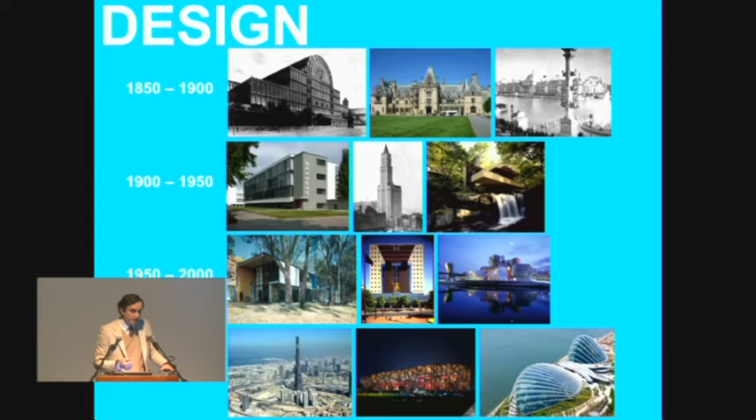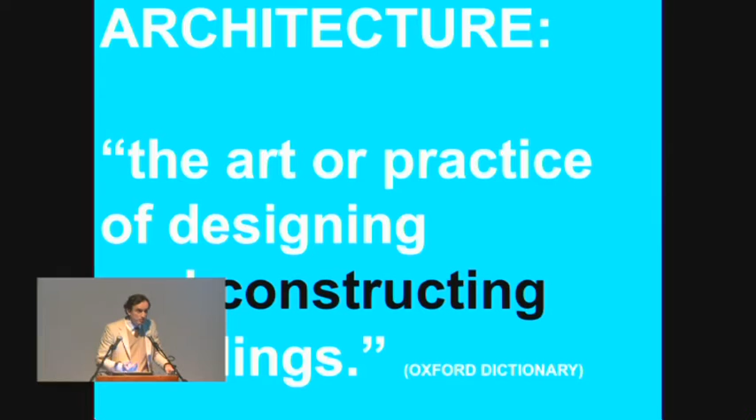But again, looking back at the definition, that's only half the equation, okay? So now let's look at the other half. What have we done as architects in developing new and interesting and conscientious ways of constructing, right?

Well, 150 years ago, little more, here they built the Crystal Palace. 90,000 square meters, 5 stories tall, glass facade, curtain wall, totally modular steel frame. We haven't really come far.

I would say that we haven't really come anywhere in terms of construction in the last 150 years. We build different shapes, but we build them in the same way, okay?

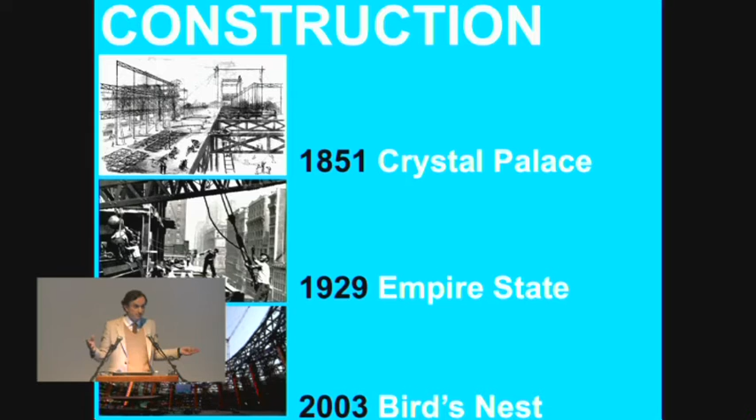So, you know, getting back to this definition of architect, we've only been doing half the job. Now, what is construction? How important is it? Why should we look at it?

Well, by definition, or statistically, I should say, it represents 10% of the world's GDP, so it's a huge industry. 1 out of every 7 jobs, it provides 1 out of every 7 jobs in the world, and it represents 1 out of 3 basic human needs. We spend most of our time in buildings, we keep all our possessions in buildings, we house our families in buildings, okay? So this construction thing is kind of a big deal.

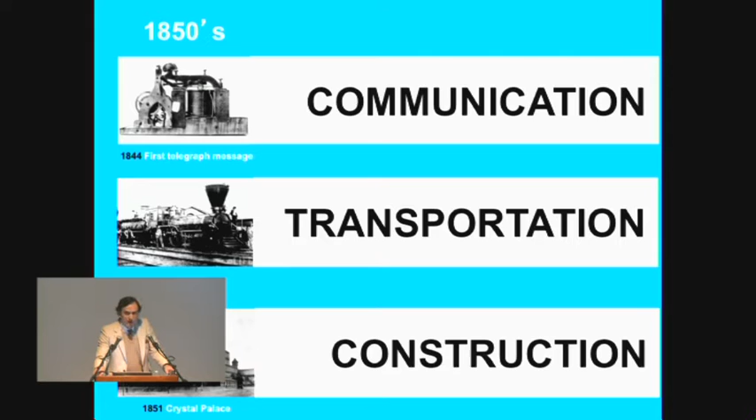Now, to put it in context, let's compare construction and the evolution of construction over the last 150 years to 2 other big industries. Now, these aren't industries as big as construction or as impactful, but still, they're pretty big: communication and transportation. 150 years ago, more or less, they developed the first telegraph.

Now, we've got little supercomputers in our pocket. We can research practically all of the world's knowledge at our fingertips on our computers, and we can reach out to anybody that we'd ever like to know. So, you know, it's pretty easy to make the argument that we've come a long way in 150 years in communication.

Similarly, 150 years ago, they invented the steam engine, or also they just patented the bicycle. Today, we've got supersonic jets that are incredibly high performance. We've got high performance electric cars. We've got a Martian rover. So clearly, we've come a long way when it comes to transportation.

But, you know, my argument is very, very little, relatively nothing when you compare it to these other industries. I mean, honestly, the Crystal Palace, 90,000 square meters of it, was conceived and completed in 6 months. Can anyone think of a building even half the size that was executed from concept to cutting of ribbon in even double that time? Right? It's kind of wild that Joseph Paxton was so far ahead of his time, and that we've really dropped the ball since then.

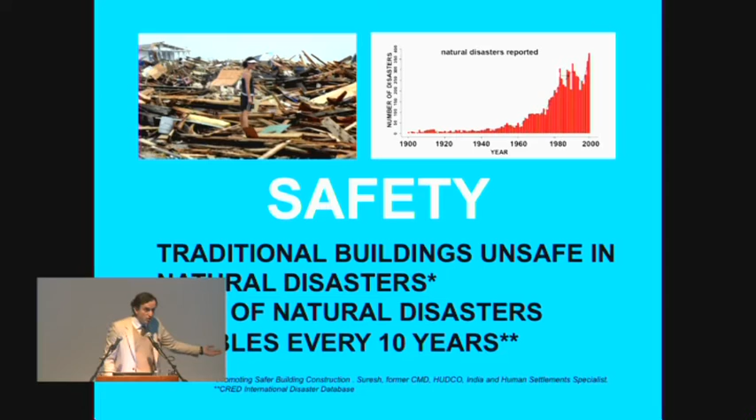Our lives depend on it, so do our children, so does everything we own. Now, in terms of affordability, construction is questionable too, because 1 out of 4 people today is either homeless or living in substandard housing. So we have to come up with a better way of building from a humanistic standpoint. 1 out of 4 people in this room statistically should not have a house to go home to.

And building is by far the worst polluter, accounting for 50% of our natural resources annually. It uses 40% of our energy. 40% of our carbon emissions are produced by construction, and 35% of our solid waste stream. This is a very, very large, wasteful industry, and nobody's talking about it or doing anything about it.

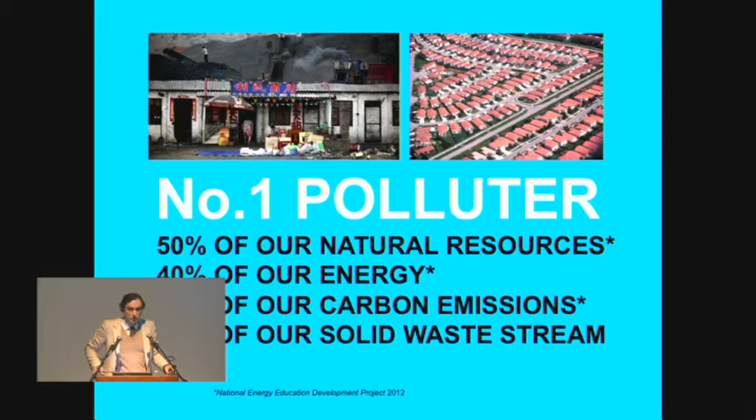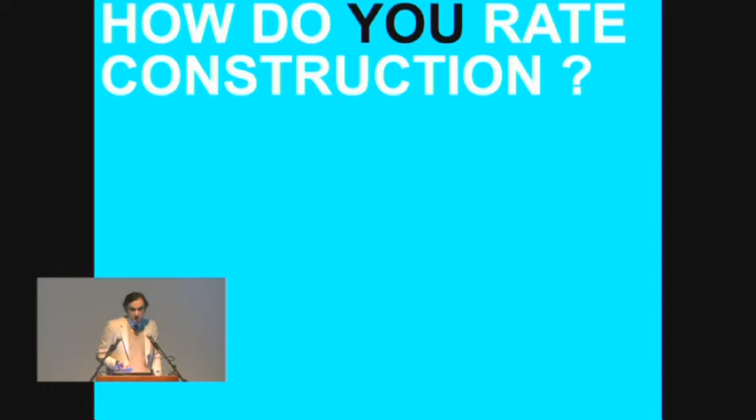So looking at this, remembering how well we've done in design, the question is, how do we as individuals rate construction? How's it going? How much have we done in the last 150 years? Do we need to think about it? My opinion is that construction is not safe enough, not green enough, too costly, and technologically antiquated. And I think the facts bear that out pretty solidly.

So what's interesting is that I was part of the problem rather than part of the solution. But what this book is trying to teach us—and you can see how thick my head is, because I only caught up to this about 5 years ago when I had children of my own—what my father is telling us is, let's look at different ways of construction, because it's cool. There's a lot of opportunity. It's a big industry. There's a tremendous need.

If you care about people, think about construction. If you want to make a lot of money, think about construction. Even if you want to differentiate yourself from the masses of talent that are all looking at design—I have a blog, and I've been posting great architectural firms every day for the last 5 years. There's so much talent all around the world looking at design. If we could take a small percentage of that talent and dedicate it to construction, which is by definition half of the equation, without forgetting about design—why? It informs design. And that's what this book is about.

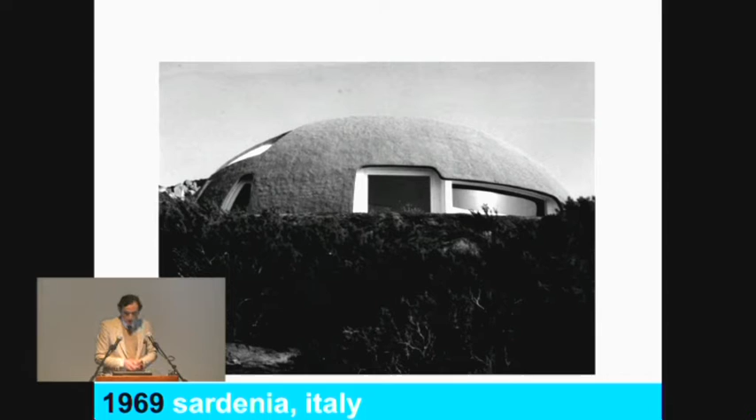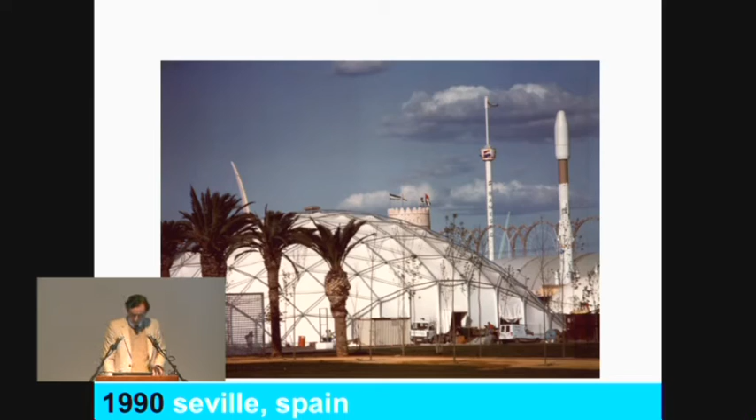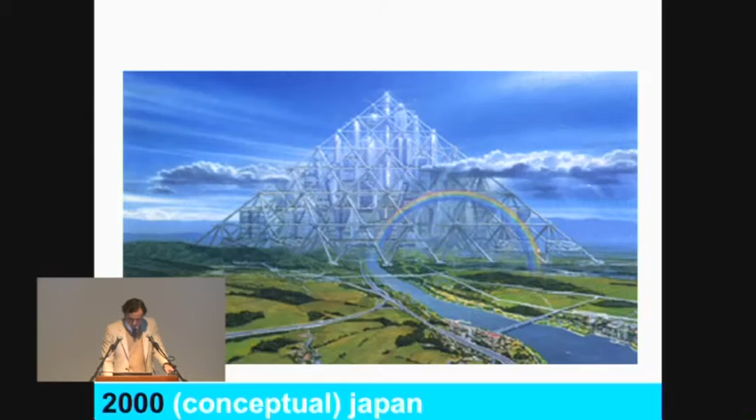So all sorts of interesting ideas, all explained in the book. And it's cool. One of the things that's cool about thinking this way, and the opportunity we all have when we start thinking this way, is that we have pretty good company of people who all thought differently and had fun and did good stuff.

That's the thing my father's encouraging all of us to do. So that this isn't totally abstract, I decided to illustrate an example of how I tried, 5 years ago, to start cluing in and take some of his thinking and evolve it in some way. So I had this sort of technological know-how, all these various construction systems invented by my father.

Now, a lot of these systems were no longer code compliant, so I had to look into codes and evaluate international codes, make sure that whatever I came up with conformed to those codes, because you have to be practical. I also looked, with my team, at material improvements, of which there have been many, and compared different materials, availabilities, etc. Then I also tried to look at this from a market standpoint, understanding the market, speaking to people who know a lot about things I have no idea about, and learning from them.

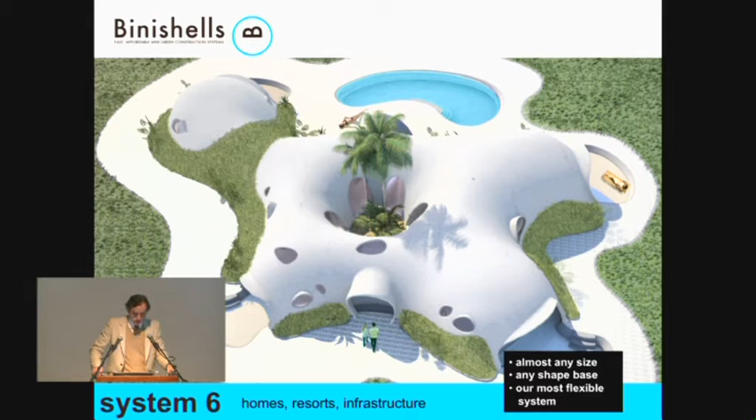Then, in a more expressive, architecturally based solution, we developed Binishell System 6, which is practically any size, any shape, very flexible, still very green, and highly affordable compared to traditional structures, and applicable for homes, resorts, and other infrastructure projects.

The net result is that the costs are reduced. By this I mean environmental costs, because we use less materials, less than half the materials, and also bottom line costs. The two biggest line items in building are materials and labor, so we use less of both. Because of that, it costs less, but at the same time it's far more green, which is increasingly important.

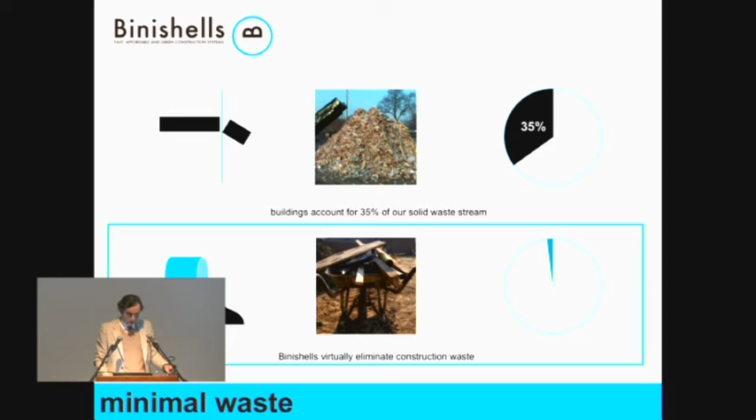Why? Primarily because of the efficiency of the building envelope. It's a thermal bridge-free envelope, and as I said before, that really impacts the energy use of the structure in a very positive way, decreasing it by around 75 to 80%. And then there's minimal waste - there's no cut material on site, it's all poured, you just pour what you need. So you get at most a wheelbarrow of waste per building, which is an advantage for cost and from an environmental standpoint.

And it's far faster, which is cool because if you've had a disaster in your country and need to house people quickly before they get diseases, it's important to act fast. But also, if you're a construction company looking at your bottom line, building things 3 times faster means you can do 3 times as many projects in a given year, which is really all they think about. So you feed into that, but with a better product. In the end, everybody wins.

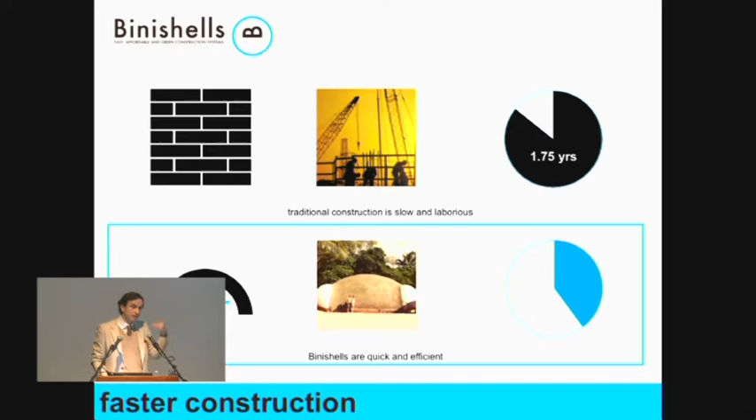And it's far safer. We all know that traditional construction has right angles, beams meet columns. That is actually the least structurally efficient way of building. Interestingly, that's how we build and house our children and all our precious things.

A dome, on the other hand, instead of concentrating energies in very inefficient ways, distributes energy in the most efficient way possible and is therefore far more materially efficient, which is why we use less materials and impact the environment less.

So what have we done with these things? A couple of examples: we've got an exciting project in Malibu for one of the most famous actors out there, and this is going to be his family's home. We're looking at interesting ways of developing the interior as well as the exterior, which is both innovative from a design and environmental impact standpoint.

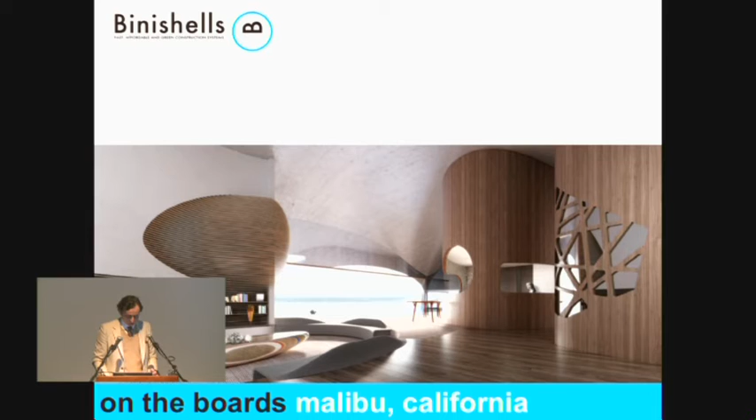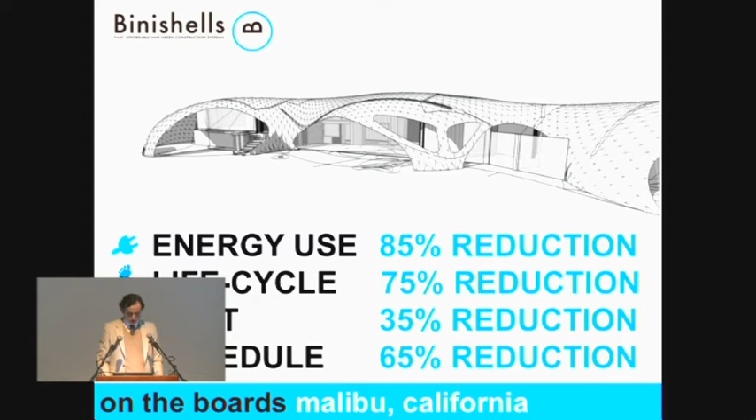The net result of this building will be that at minimum we'll reduce energy usage by around 85%. Harvard's going to be doing a study verifying all these numbers, but this is what we're coming up with so far: at minimum a life cycle reduction of 75%, overall construction budget reduced by about 35%, and at least a 65% reduction in the overall construction schedule.

We also are looking at low-cost disaster relief housing in the Philippines, using System 5, and there will be a reduction in energy use by around 70%, life cycle impact by about 55%, costs by about 45%, which is exciting, and schedule reduced by about 75%.

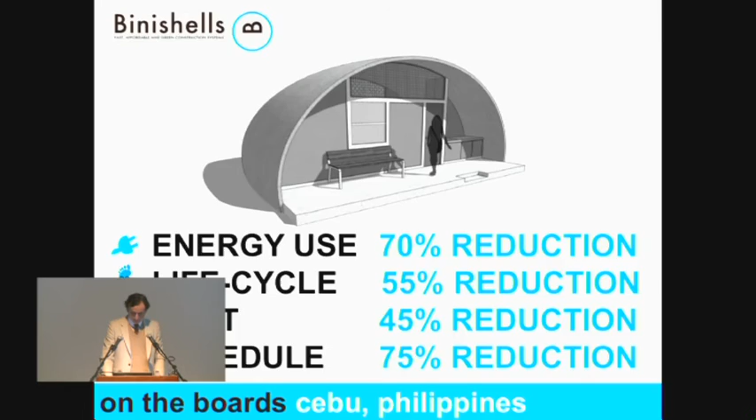So again, it's exciting and important, I think, to absorb the lessons of my father through this book about thinking differently about architecture, and to use local slang, think out of the box and carry on.

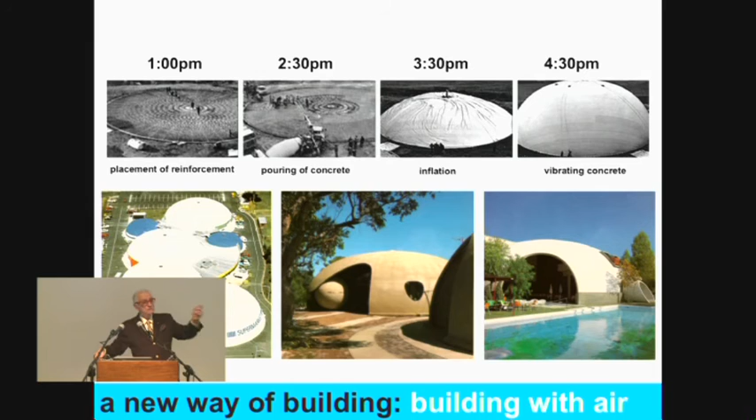Okay, thank you. You have 300 tons of wet concrete—25 ready-mix concrete trucks, to give you an idea. The first time I did it, I could not believe I was able to raise this with a blower of this size, with such negligible pressure.

This is covered with a second membrane only because we want to vibrate it. The problem is that when you lift the reinforced concrete, it disgregates a little bit, so you need to recompact it to make the structure solid.

Initially we smooth it by hand, but when you have such big dimensions—you see those are people—this is a 36-meter diameter dome, bigger than your St. Paul's dome. And when it comes up in 60 minutes, you have to finish the job in that time, because otherwise you produce a skating rink.

So this is a limit. Using this concept—controlling the uplifting and using the cover to vibrate the concrete—you produce a real self-reinforcing process.

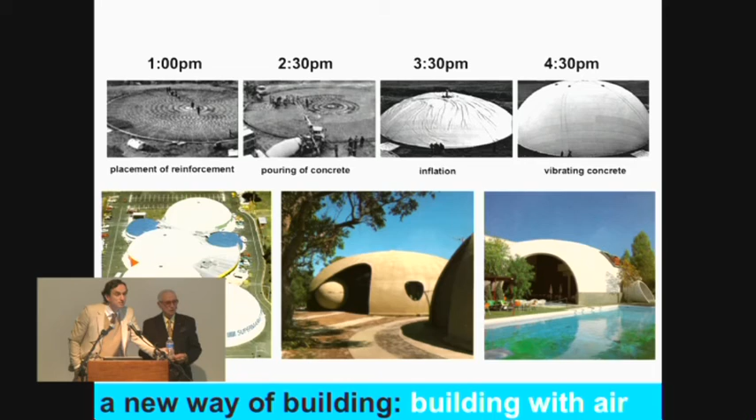No, I'm just saying—sorry—that the reproducibility of the same dome multiple times, I'm just questioning if this is actually getting the design closer to the fight of making architecture, because I find it really interesting to challenge the fact that architects are not thinking in this design way, which can be really interesting.

And so the thing that interests me, and what I did my thesis on when I was at grad school, is this massive international need for low-cost housing. So when I thought about it with a friend of mine who's an engineer at the English firm Arup—we went to grad school together—we thought about what is the most efficient way of building.

How can we think about a way of providing homes that fit a lot of bills and check a lot of boxes? What we found is that this idea of building domes is extremely efficient. Why? Because domes are stronger, therefore you use less material. Concrete is extremely environmentally inefficient, while at the same time being the product we make most of as a species.

They don't burn, they're fireproof. And the resulting structure is very strong in all sorts of different ways, like Dad's pointing out - fires, earthquakes, high winds.

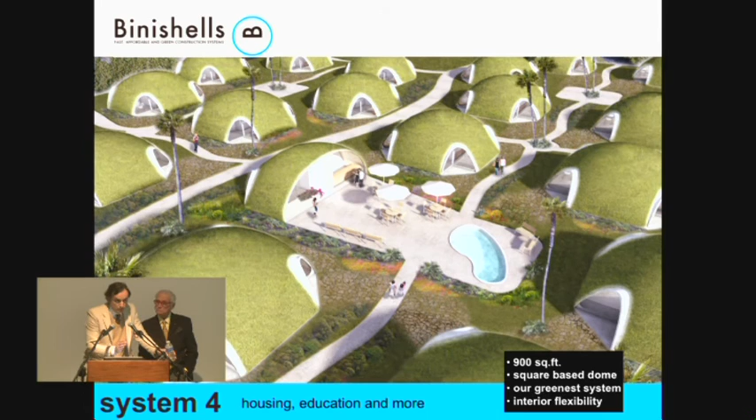So the next challenge is, how do you aggregate them? I'm not suggesting either of these two ways are award-winning solutions, but what we're trying to do is think about when you do a lot of these things, what do they look like? The argument can be made that the Hellenistic concept of a pitched roof and a square box under it is not necessarily objectively attractive, nor representative of home or any of the cultures it ends up being implemented in, other than possibly Greece. So if you provide another solution that costs, let's say, half as much, but is greener and stronger, you're heading in the right direction.

One of the other things I wanted to look at is the fact that domes are something that's especially difficult to marry with the concept of home. So what we've done is taken the circular plan and turned it into different, and sometimes rectilinear, shapes to facilitate ordinary lifestyles. It's a step towards improving the environment, providing safer homes more affordably and efficiently.

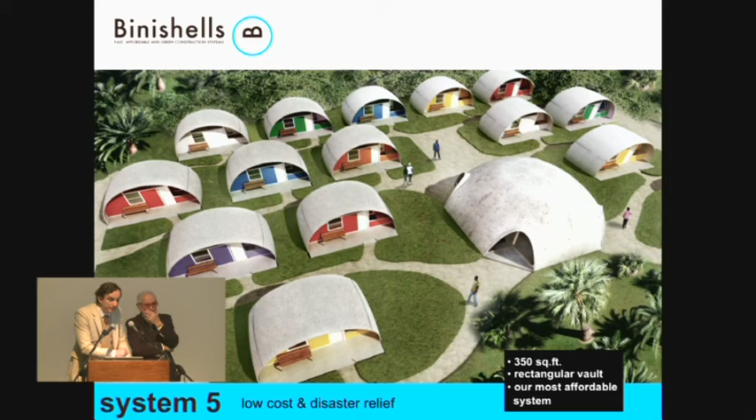But it's exciting, and I like curvilinear. I think it's very sexy that this system is not designed by me, but is designed by nature, specifically Pascal's laws. And that, to me, makes it more objective than, again, the Hellenistic pitched roof solution. You can say it's a little bit more pan-cultural because it's not biomorphic, it's biologic, so it's quite interesting from that standpoint. It turns out that a lot of other designers are looking at curvilinear too, but a lot of great design has also been developed as rectilinear. I think there's room for both.

But the main thing is, let's just think of the other side of the equation, because construction is a big deal. Yes. No?

Oh yes, I'd like now to keep it on track, and thank you for your interesting presentation. Last year, in the month of July, I found out that IKEA had a similar idea to yours, and when you mentioned that you talked to the UN about it, I'm very interested in their opinion, because I actually know IKEA's costs for what they are trying to do in changing the tents that house political refugees and zones of conflict.

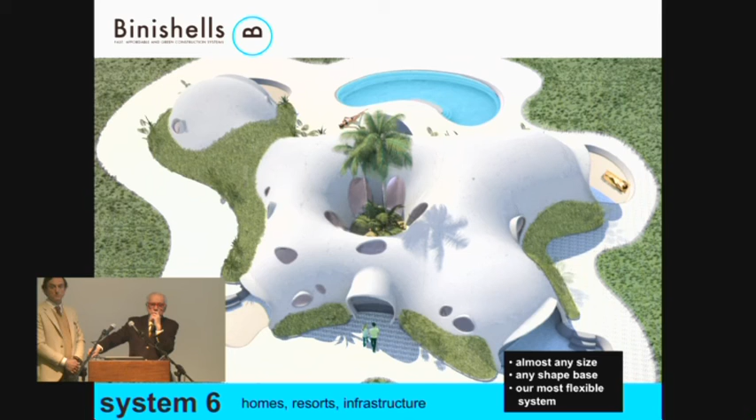So they're talking about designing a low-cost house that in prototype phase costs around 10,000 euros, and when they begin mass production, it will cost around 1,000 euros per unit, which in my opinion is around 10 times more than you pay for a tent. So I would like to see what's your take on this?

We don't know about the mass production element yet, but in working with a company out in the Philippines, our prototyping cost for each unit is somewhere around $2,000 for a finished structure. The additional advantage versus prefabrication, which is as old as Stonehenge potentially, is that it's all built in place, and the material is developed by a local cement company, which keeps the money locally.

Plus, when you look at the environmental impact of prefabrication, prefabrication begins in the Swedish plant or in a local plant built to build these things down the line. And the overall efficiency of a prefabricated structure is very comparable to a traditional structure, versus a thermal bridge-free envelope which provides additional advantages.

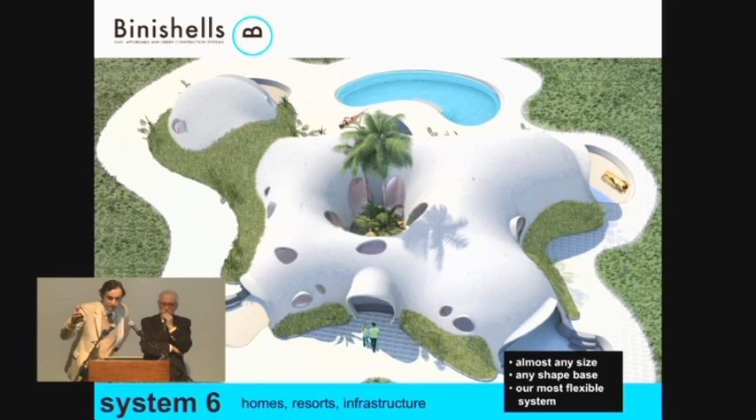So there's room for all sorts of different solutions, and it's wonderful that a forward-thinking company like IKEA is looking at low-cost housing. What's surprising to me is that more students, more architects aren't looking at the big picture of low-cost housing and the opportunities it presents.

Yes? Microphone. Hello? Yes.

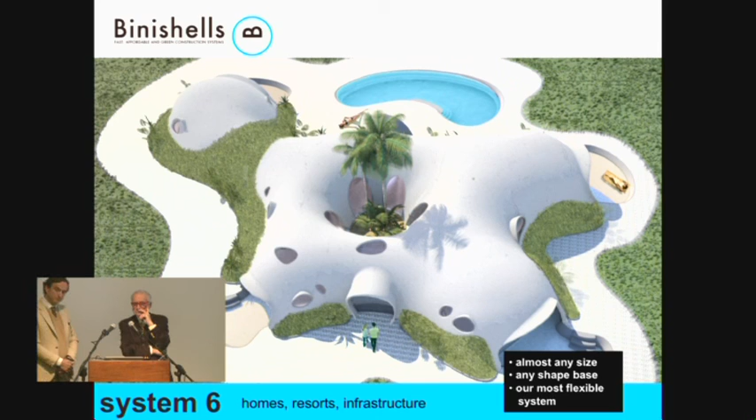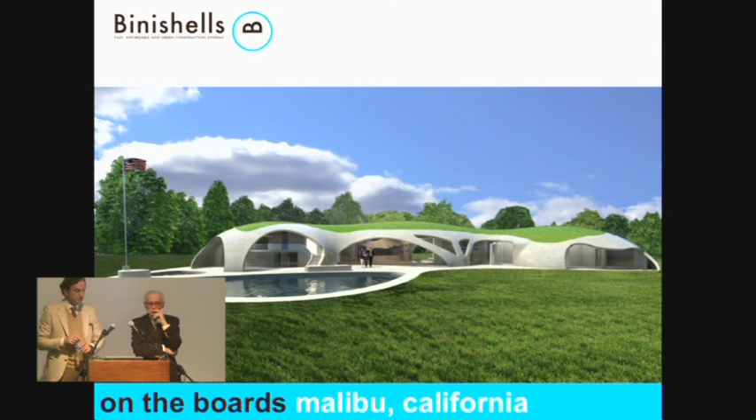Well, it's obviously a very efficient and beautiful building and design system. I'm actually more interested to know about the interior. For example, is this a one-story construction? Are they all effectively bungalows, or have you tried to divide it into different stories? And if you do, how do you do it? So you blow up the dome, and if you have added other stories—sorry, I missed the beginning of the lecture, so perhaps you've shown it before—how do you do it, and how does it work?

Very relevant question, and my father will answer. You can build multi-story. The stories built on the interior are built traditionally, and the shell is the thing that's different, so there's room for improvement there. That's what my father worked on for a period of time. The interior structure that's built in a traditional way is freestanding on its own, structurally detached from the exterior shell. That's one simple solution, but there are more sophisticated ones.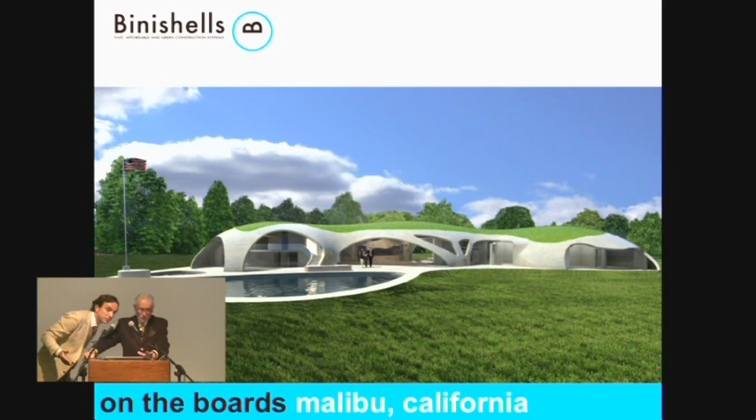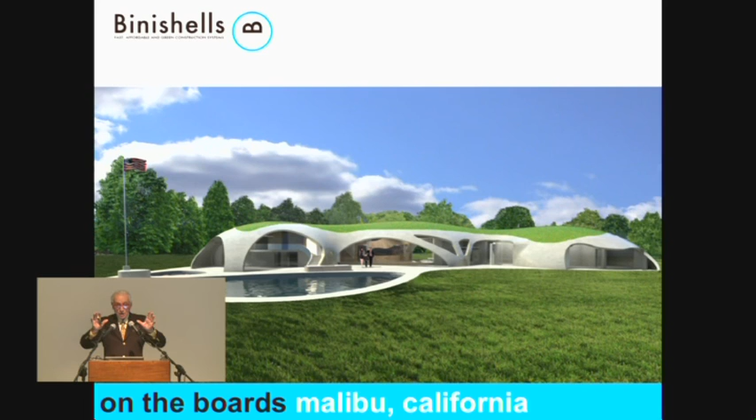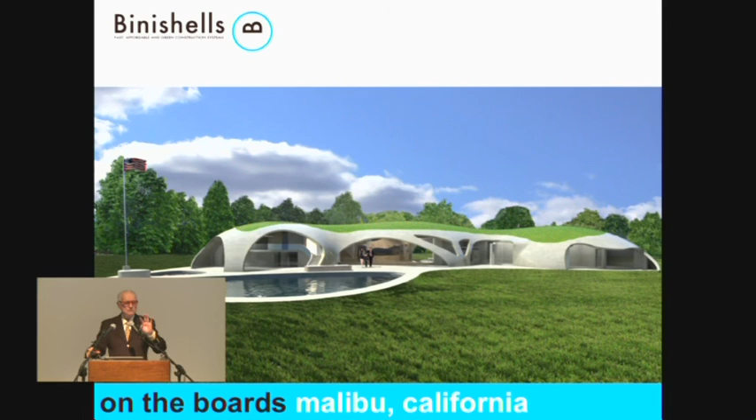I remember a very interesting project I was requested to design for the former Soviet Union. They wanted to build 14 million houses built in wood, not concrete, with the shape of a traditional house. So I said, have you been able to build a square-based soap bubble or not? Then I stopped talking that way because the 14 million was an important subject. I designed a traditional house built by air pressure after all the components were on the ground. I built it in California and made a model. I brought this model to Moscow, in front of the mayor of Moscow at that time. I was able to show that in a few seconds I could lift and shape 16 pieces of prefabricated components of a square-based house, traditionally made, built only using air as energy. Then, unfortunately—fortunately for them—Gorbachev came to power and all my project was shelved.

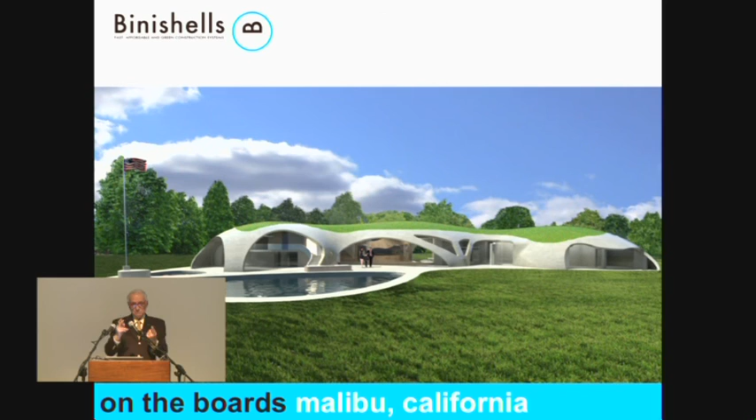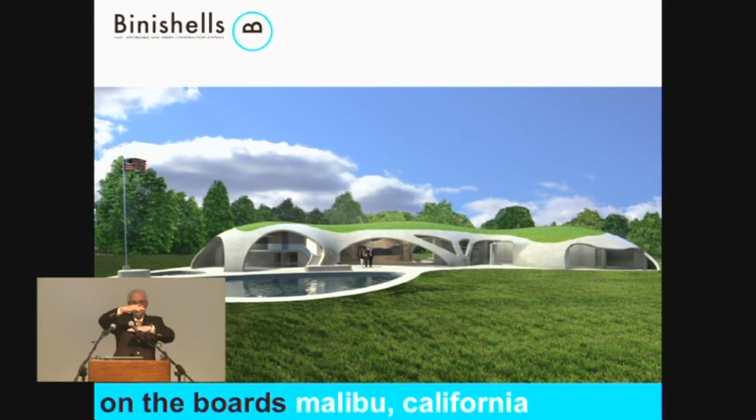But the point is this: you can use the concept of air pressure as energy for everything. Before that, I was making something similar, because in Japan I built a model of a multi-story building using compressed air to lift a floor to the second story, along pipes, along vertical supports. Then I was able to make a vacuum between the first floor and the second floor, reaching the first floor and going up like this. We were able to build a multi-story building in a model. So it is possible—if we start thinking in a different way. This is what I was trying to say before: we have to use a different perspective, a different philosophy in construction. In my case, I was lucky to find that air pressure was an incredible power to use, and very green for building. But you can use different technology.

I don't know, but don't stop thinking that what we read in the book is the only Bible you can follow. Use your imagination and proceed. If you look in my book, you'll see a number of building systems I've used and built in different parts of the world, not only domes. The dome, the Binishell, was the first one, but you'll see a number of construction systems which originated from the Binishell and then found different avenues. And this is the beauty—I don't think this is the only way. When someone tries to open their mind and think out of the box, you'll see something extremely interesting.